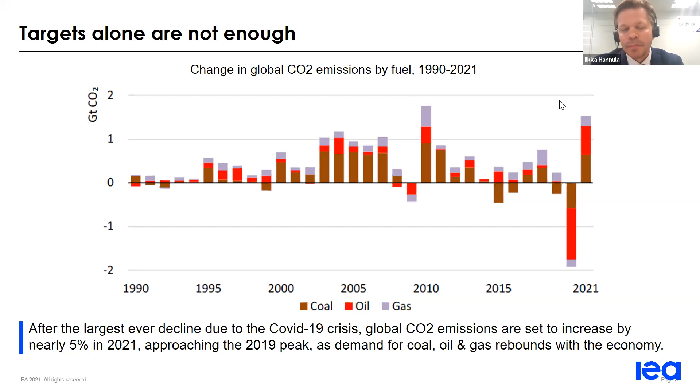Now, pledges are there, but targets alone are not enough, of course. Despite many meetings, we still have not witnessed a sustained decline in emissions. Indeed, the IEA now predicts that global CO2 emissions are set to increase by 5% this year as demand for coal, oil, and gas rebounds with the economy. So clearly now it's time to start implementing those ambitious pledges.

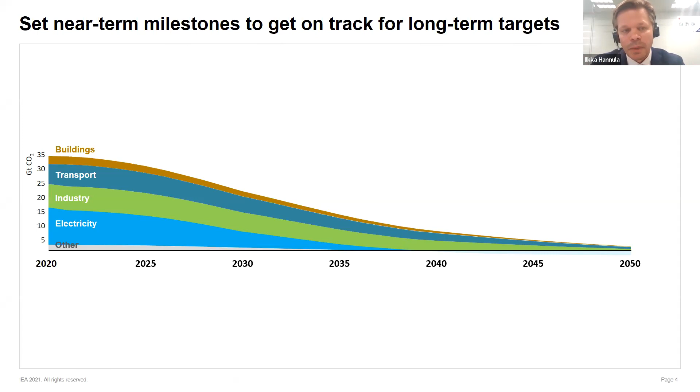And as a part of that, the IEA published this May its net zero emissions 2050 roadmap, with the specific aim that, because the long-term targets are important, but it's very difficult to say what we should do today or tomorrow in terms of policy so that we would know that we are on track with our ambitious long-term goals. So this roadmap, the first global net zero emissions roadmap, has taken this long-term view and broken it down into near-term measurable milestones that can be considered by policymakers, so that if you implement these, then you know that you are on track with your long-term goals.

The roadmap includes over 400 milestones. Here, some of the most important ones are written out. I want to highlight some things that I think are especially interesting and important from a bioenergy perspective, like having half of aviation fuels sustainable by 2040, having a net zero electricity sector globally by 2040, and capturing 4 gigatons of CO2 already in 2035. Each of these is a big feat on its own; taken together, a complete transformation of the energy sector.

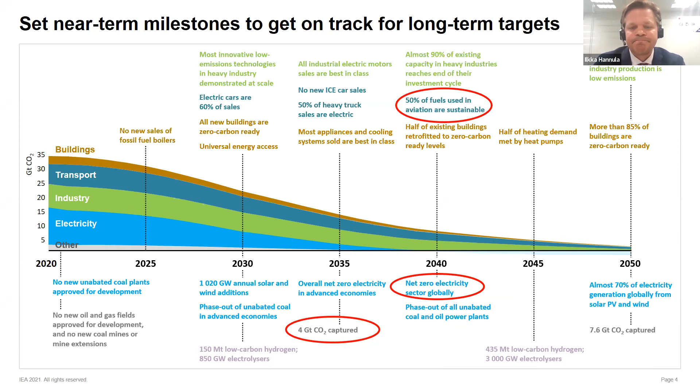So looking more closely at the contribution of bioenergy in the roadmap, we see a number of things in this figure. One of them is that bioenergy contributes to all relevant energy sectors: electricity, industry, heat, and transport. The total use of modern bioenergy increases fourfold, from about 25 exajoules today to about 100 exajoules in 2050.

Fourfold increase, while at the same time, the traditional use of biomass, which is significant today, mostly meaning collection of fuel wood for cooking purposes in developing countries, which is unsustainable and polluting, is phased out completely during this decade in the roadmap. So the unsustainable part is phased out, and the modern sustainable part quadruples in the next 3 decades. So in 2050, bioenergy meets almost 20% of total energy needs and becomes the second largest source of energy supply, second only to solar. So obviously, bioenergy plays a crucial role in the net zero emissions roadmap.

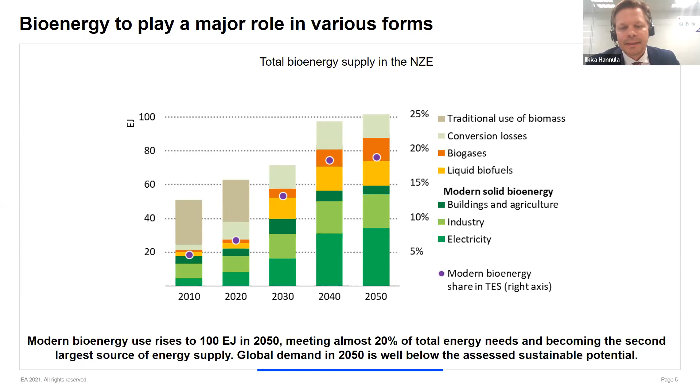Looking more closely to fuels, we see significant expansion both on gaseous and liquid. So on the gaseous side, biogas expands, but especially in upgraded form, as biomethane, it witnesses a significant expansion. In liquid biofuels

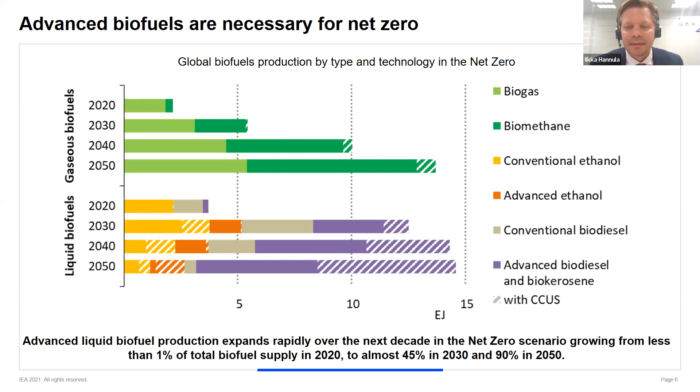side, advanced fuels grow and expand rapidly over the next decade, so that they go from less than 1% of total biofuel supply in 2020 to almost 45% in 2030, and then eventually 90% in mid-century. And increasingly they are going to be produced in connection with CCUS. So you see the shaded part of the bars here, they illustrate the share of production that is connected with CCUS.

Also on electricity, bioenergy increases. Here you can see that it happens both in terms of absolute generation, but also as share of electricity generation, which is significant because electricity production expands significantly in the roadmap, but still bioenergy grows more than the total supply, becoming about 5% of electricity generation by 2050.

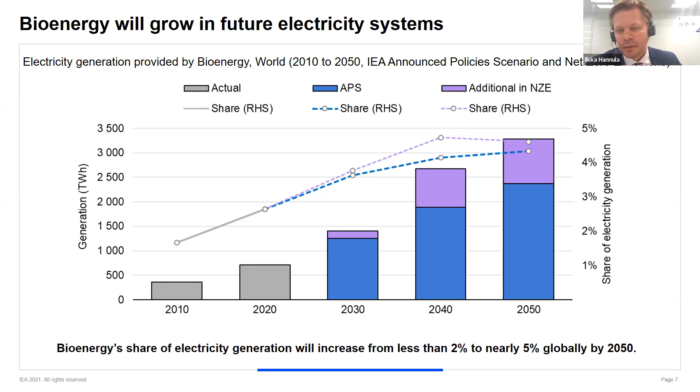But bioenergy in the electricity system does not contribute only through low carbon electricity, but it also provides other services. So as you can see here, a case study for China on the right-hand side, the 2060 situation. Bioenergy not only provides energy, but it provides stability, it provides flexibility and capacity adequacy.

So it is this unique feature of bioenergy that it can address all the services needed in the power system, whereas some other, although critical, technologies are more limited to some services than bioenergy. So a very important part of the story here.

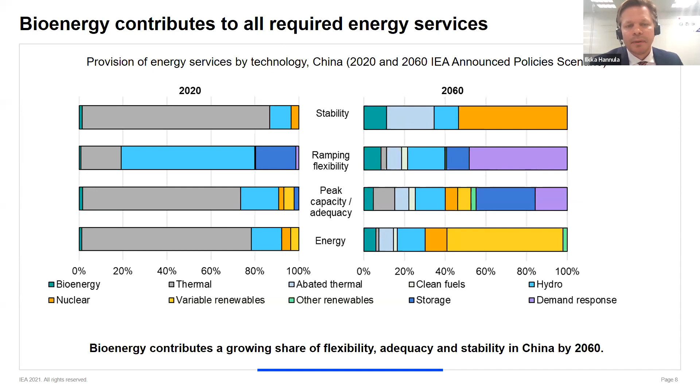And then I want to finish off by focusing on this capture part. So bioenergy with carbon capture, utilization, and storage. By 2050, the roadmap sees almost 8 gigatons of carbon dioxide captured per year. That comes from a diverse range of sources, mostly from industrial emissions and from fossil fuels, but about 1/3 of the CO2 is biogenic and atmospheric in nature. And of that, about 80% is stored, and the rest, about 20%, is utilized for products.

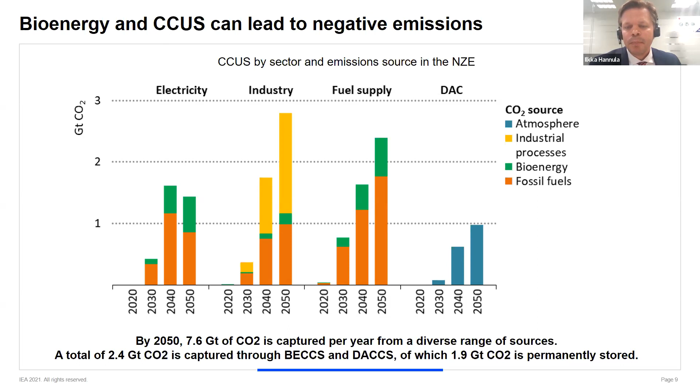So I think a really interesting part, again, coming to the front as a byproduct of net zero emissions pledges, is that you cannot achieve it without negative emissions, and bioenergy will play an important role in that respect as well. All right, so I want to give some concluding remarks here.

So as shown in the roadmap figure, I think it tells quite convincingly that to reach net zero globally by 2050 is nothing short of a revolution, an unprecedented transformation in the way we produce, transport, and use energy globally. On the low carbon fuel side, liquid biofuels, biomethane, and also hydrogen-derived fuels in the roadmap help to decarbonize sectors where direct electrification is challenging and costly.

And when we have an energy mix that is dominated more and more by wind and solar, sustainable bioenergy plays a major role in flexible energy generation, in industry, in transport, and is increasingly used in connection with CCUS. We just published a few weeks ago our latest edition of the Tracking Clean Energy Progress. And from there, when you contrast the current development with the net zero demand, bioenergy is not on track. There are many technologies that are not on track with net zero emissions, and bioenergy is one of them. So a strong boost for bioenergy is needed to be on track.

We need to both deploy everything we have commercially available today at an increasing rate, but importantly, also for bioenergy, we need to develop new technologies during this decade so that they will be available commercially in the 30s and the 40s, to shoulder the responsibility of further carbon emission reductions when we are chasing that net zero. Thank you very much.

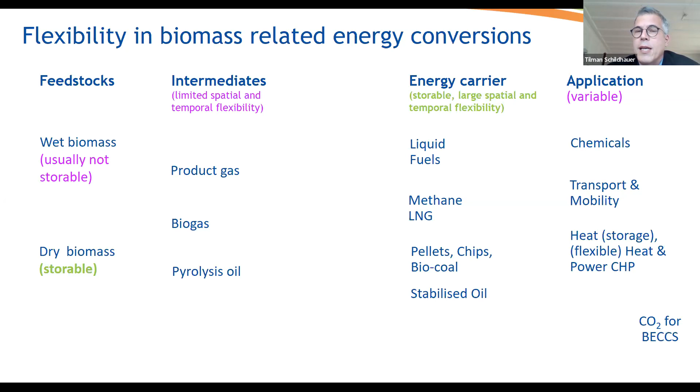Now, this flexibility of bioenergy has two dimensions. One is the short-term flexibility, and this connects immediately to electricity production by renewables, especially wind power or photovoltaics. If supply and demand do not match, biomass could help two ways: producing electricity when it's needed and not enough is supplied, or taking up electricity which cannot be used where and when it's produced. That is what we call short-term flexibility, positive or negative.

The other one is long-term flexibility, and that means we convert energy into a form where we can transport it or store it. So we get a larger spatial or temporal availability of this energy.

What we recognize is there are existing technologies used today, and in the next slides you will see them indicated as green arrows. There are emergent technologies, which have been demonstrated successfully on the technical level, so they work, but at the moment they are not so much applied because we are lacking business cases. And with the red arrows, you will see the ones which are still under development, below pilot scale.

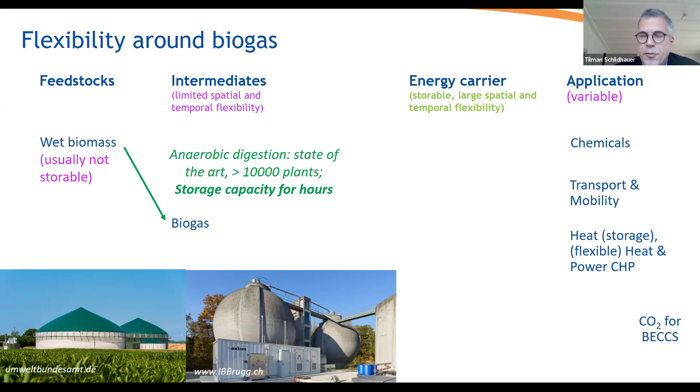There are two ways to use that. One is using the long-term flexibility, so producing an energy carrier for which we have a storage and transport infrastructure, that would be methane, or if you liquefy it, LNG. That is by separating the CO2 from the biogas. This is also a very well-known, well-accepted and very often used technology, also very flexible with time. You can start and stop these plants relatively fast.

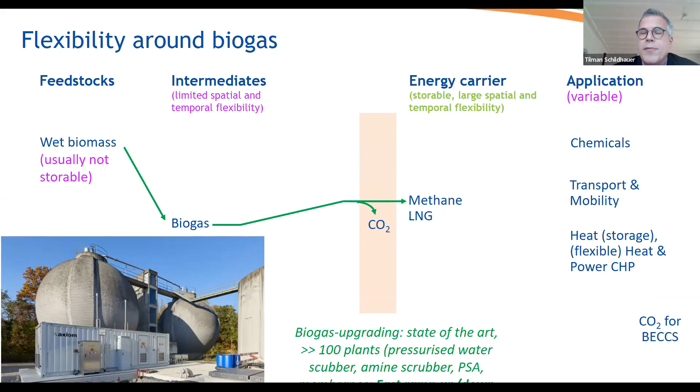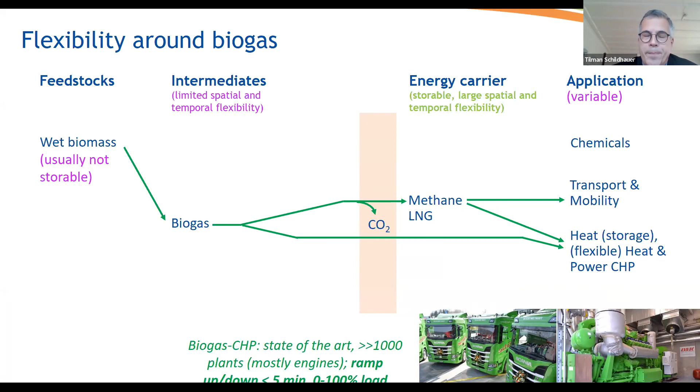So these are technologies that are well known. What is a little bit developing is using biogas for power to gas. So we actually use the CO2 part of the biogas to store hydrogen in form of methane. So we convert hydrogen, which is produced from renewable electricity, which cannot be used otherwise. We store it by converting it to methane, and then we use the methane infrastructure.

And this technology technically has been shown in several plants. So we know there are plants which work in megawatt scale. So we are here at TRL 7, 8. And this is a technology which is on the onset of being used also commercially, but at the moment there are very few plants.

What you usually have is when the plant is warm, then you can start up within 20 minutes. Most of them actually are able to inject the methane into the grid within 10 minutes or sometimes even 5. So they're really nice, and depending on the technology, also here have a very strong load range. Some of them can work with very little hydrogen, others start at 20%, but generally a very flexible technology to take up electricity, so to offer negative ancillary services on the one side, and converting biogas, which cannot be stored, into an energy carrier which can be stored and transported.

And the last thing which actually comes out, both from the upgrading of the biogas, but also in the use in the CHP: in principle, there is biogenic CO2, which you could capture and use for negative emissions. This is actually not so much done so far and more under development, but clearly an option to reach net zero emissions. And in future, it will most probably be a kind of a balance where we use the biogas for negative ancillary service of power to gas in summer, but in winter, when no hydrogen is available, we might go and then separate the CO2 for negative emissions.

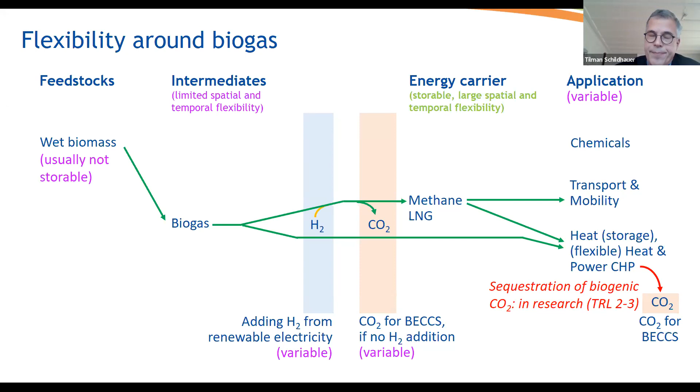Let's have a look on the wood side. There, the first thing we can do is actually forming chips or pellets and using it, again, in combined heat and power plants, or to make a little deviation by producing product gas by gasification. Again, many plants in small scale. If you have a combustion or a gasification, then the startup time is not that fast. It's between 1 hour and 1 day, depending on the size.

Load range is moderate. But again, like in the biogas plants, the engine or the organic Rankine cycle, which actually uses the heat or the chemical energy input, can change the load very fast, and again can jump in for flexible peak generation, or turn down electricity production into part load if too much electricity is in the grid. So again, this is a very well-known and well-accepted technology which could be used for short-term flexibility.

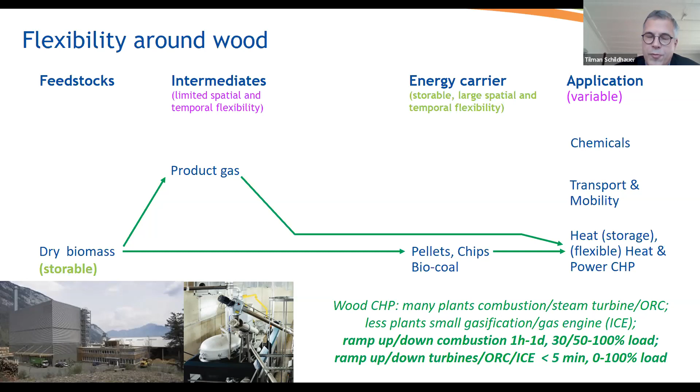Generally, this way over gasification is also possible in a large scale. So we know a couple of these plants; here again, because of the size, gasification most probably takes nearly a day, but the gas engine itself is very flexible.

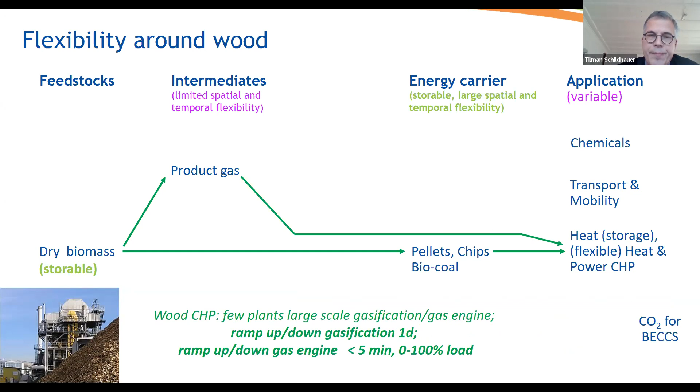Something which emerges now lately is actually pyrolysis of wood and similar feedstock, where the pyrolysis as such is more or less commercial. So there we see the first plants being built at several places. As I said before, the pyrolysis oil itself should be used relatively fast because it has this tendency to change chemically. But in principle, it could be stabilized with hydrogen. This is something which has been shown in many experiments, and the technology is very close to what we know from refineries. So I think once the business case is there, that will be applied in many places, because it's another way to get decentral biomass into an energy carrier which can be easily transported.

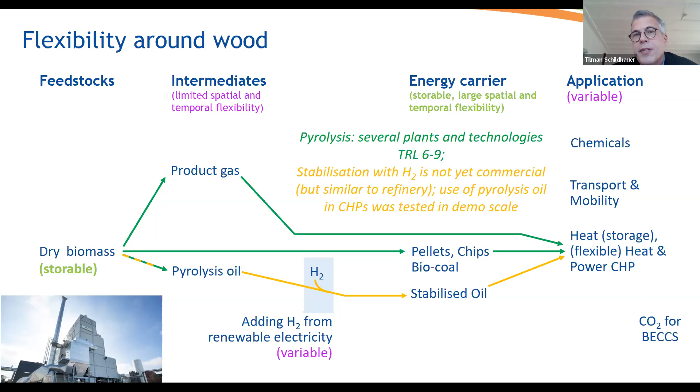And principally, like in the biogas case, there would be an option to add hydrogen to the system or take out CO2 for negative emissions. So use it flexibly, and even maybe change that behavior depending on the electricity supply or the electricity price. So when electricity is cheap, you add hydrogen, you produce more of the fuels and get all the carbon into your product. And if there's no cheap electricity, you maybe do not add hydrogen, and then you have to separate CO2 because it's a coupled product of all these fuels.

And then you could actually capture the CO2 and use it for negative emissions. And again, like in the biogas case, this negative emission pathway is not yet developed so far, because so far the incentives were not there.

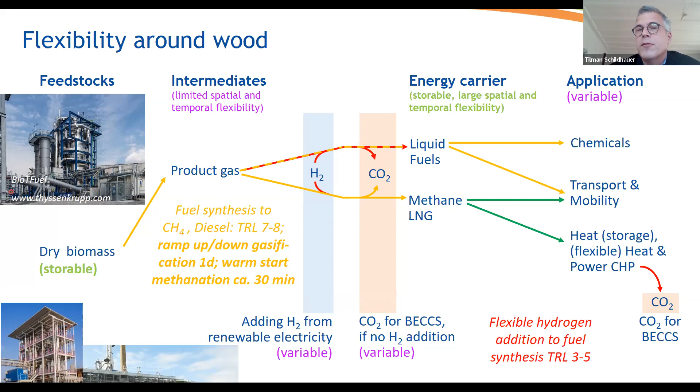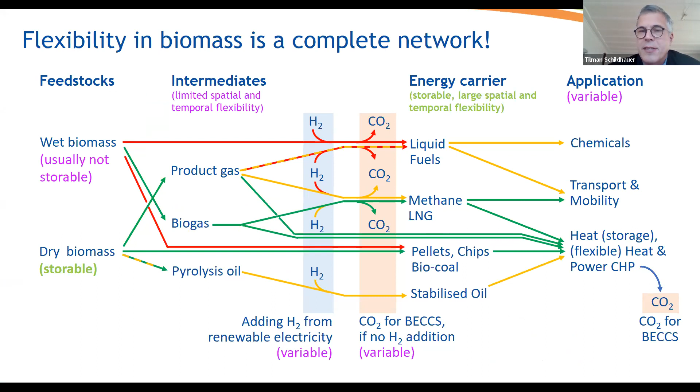So if you put all that on top of each other, we see actually there's an enormous network of flexibility options for bioenergy. And I think the future energy system can use all of them. But as I said before, some of them are more applied than others, and now we distribute them into this matrix, and we see biogas upgrading is the only technology which offers long-term flexibility and which is done in large scale.

While this peak generation we see at many places is based on biogas and also on dry biomass, and we see many technologies which are coming up only slowly, which have been demonstrated but which are not so used so far. Many of them based on wood gasification. The pyrolysis oil is there. That is something which can come up.

And we see a couple of technologies which I didn't show in the previous slides, hydrothermal processes which are actually able to get even wet biomass on the same process routes like dry biomass, chemicals from biomass. So these are things which come up. Maybe also using SOFCs as combined heat and power plants.

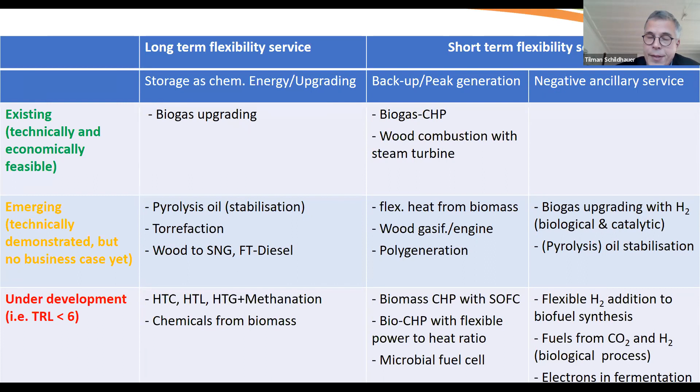Coming to my last slide, so what we have seen is there are many technologies. They have been demonstrated successfully, so they work. What we see is business cases which work, beside the combustion of wood, which always worked since ever. The business cases which work are the ones which start from waste streams, and this is usually biogas. And then all the technologies which can offer peak electricity production, because already in many countries there is some support scheme or some incentives to do so.

For wood, it's a little bit difficult to go to these more advanced technologies, because the combustion of wood is always a potential alternative, which at many places also makes sense if you anyway need heat in the first place. So you have to really look carefully where you use the wood.

Flexible hydrogen addition is something which will be more of interest in future. And this is in balance with the use of the CO2 for the negative emissions which you might need in future, and where bioenergy is one of the most important sources. And what we have seen is you have all these technology options. They have many advantages, but at the moment, most of them are not valued in a way that you have incentives to really do so.

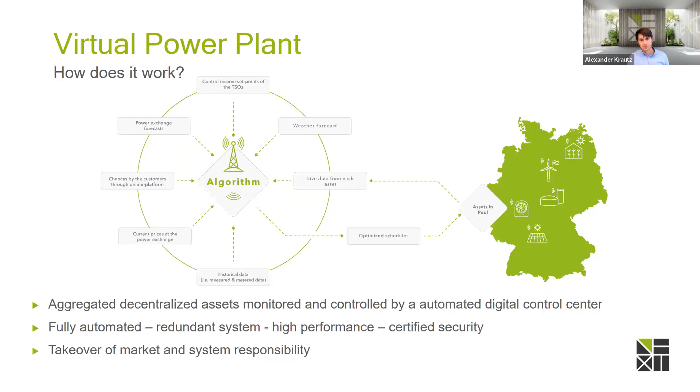Some short words on the wholesale market. That is where the electricity is traded. But it is not one market. A lot of people say the electricity market, but we have the long-term market, the day-ahead market, the intraday market. There are a lot of markets where you can trade your electricity.

At this market, each participant has a balancing group and is responsible to balance the balancing group. If you have a wrong forecast, or there are bigger maintenance works or something like that, then you have to secure that your balancing group is balanced. So you have to make a trade, or balance it out with flexible assets. There are different possibilities. On the other hand, we have the ancillary services like control reserve, which are provided to the grid operator to stabilize the grid frequency. So we have here two different markets, more or less.

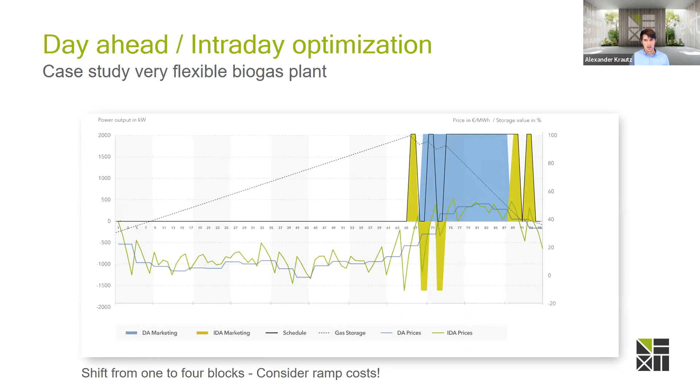Compared to this, if we talk about ancillary services, then we talk about a pool concept. To provide ancillary services to the grid operator, we have a tender. Such a pool concept is not easy to manage, but a VPP gives you the possibility. We have a daily tender, and we have to guarantee availability of 100% to the grid operators. So we need some assets in the back, and such a pool concept can only be provided with a VPP, because you need a fully automated system, and you provide a capacity, but also the possibility for the activation.

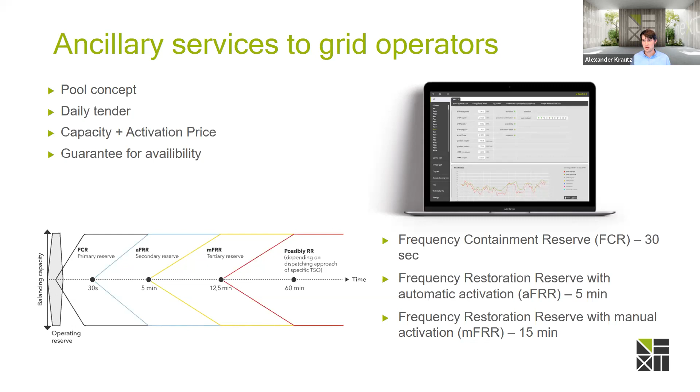Here below you can see how the FCR, aFRR, and mFRR market is structured in Germany and in most of Europe. In other countries there are similar products, but with slightly different restrictions. This slide shall give you an image of how the activation of an aFRR call works. After the call of the TSO, the system selects the best assets and activates them. If one asset is not available, the system activates the next one.

The TSOs gave us the feedback that the performance of our pool is better than the performance of a conventional power plant. You can see it here. At the top, we have activated 376 assets all over Germany, fully automated. And after the call ends, the system has to bring all assets back to the baseline. And here, a good performance is required.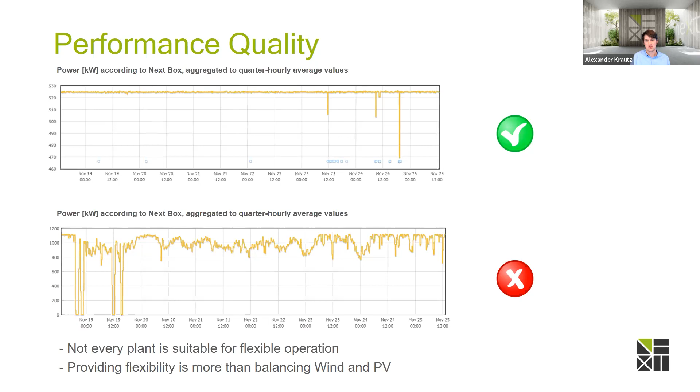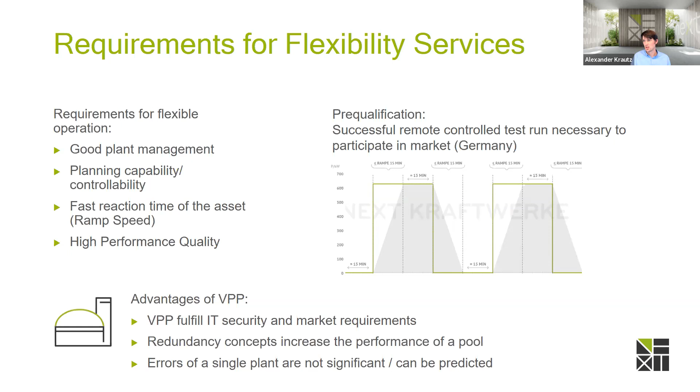So what is important for providing flexibility? Important is good plant management, and that you have a planning capability and that you can control it. If we look at older assets, it's sometimes hard to control or plan them. And as I said, also important is a fast reaction time, good ramp speed, and high performance quality. And what we also need to provide flexibility with a pool of assets or with a VPP is a fully automated system.

Because of that, we also have a fully automated customer portal. We have a web solution and an app solution, so the customer can get push messages and has the possibility to manage and remotely monitor the assets fully digitally. Your colleague can sit behind you and see how his asset somewhere in the world works. This brings us to a new situation, and this is very important for some of our customers, because not every customer is at the asset 24/7.

So my conclusion: if we look to the next decade, the demand for flexibility at the wholesale market and the ancillary service markets will increase. To participate in the market, market opening and development of wholesale markets and ancillary service markets are required. In a lot of countries, there is not the possibility to provide flexibility with bioenergy assets. In some countries, there is no real wholesale market, and in other countries, it is not allowed to pool assets to provide ancillary services.

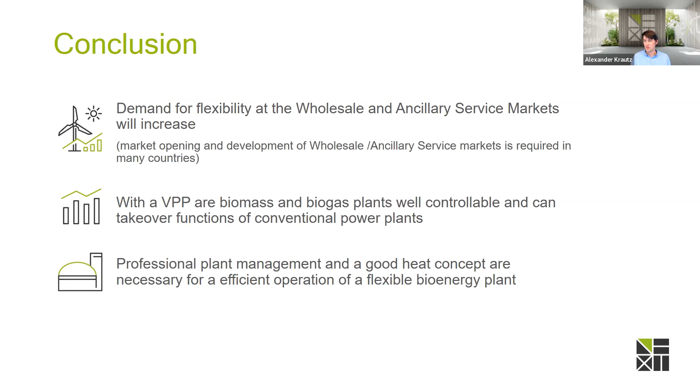The VPP gives bioenergy plants the possibility to participate in such markets, and with a VPP, you can control these assets very well, and you can take over functions of the conventional power plants. But professional plant management and good heat concepts are necessary for efficient operation of flexible bioenergy plants.

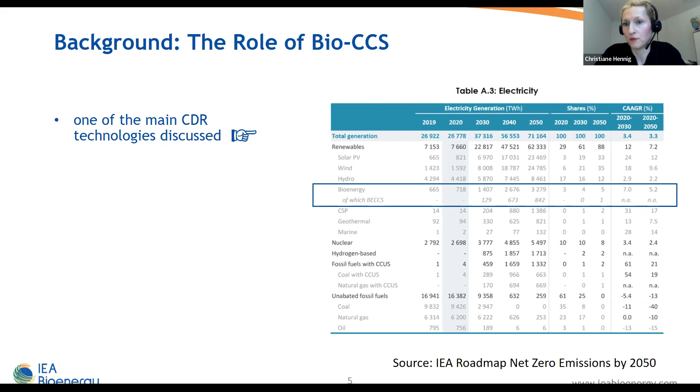So here I used one of the tables that is included in the IEA roadmap Net Zero Emissions by 2050. So you can see here that bio-CCS has a dedicated share in here. So it's going to a main part to contribute on this pathway and to provide negative emissions. So this is only one example of many where this appears in this manner.

What is interesting to know on bio-CCS, it can actually be implemented anywhere where there is biogenic CO2 emissions. So this is really something that is good to know. Of course, what would be important is that the source is rich in these CO2 emissions, so we can achieve a high capture rate. What else is important is a broad range of sectors can be used for this. So it's not only when you think of electricity, but of course it could be also in other industrial facilities or heat and power or in pulp and paper mills. So it's much broader where CCS could come in.

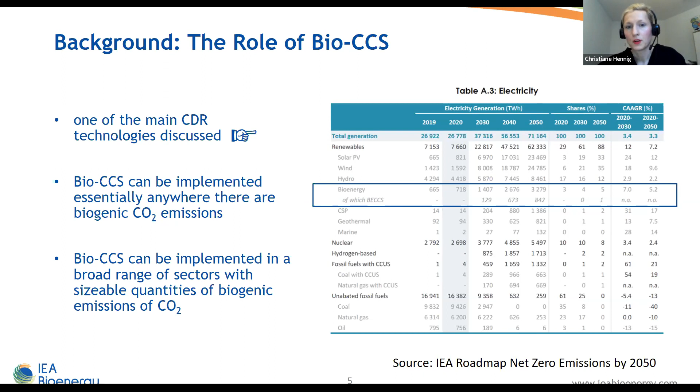Now having a look independently at flexible bioenergy. So at the beginning and in some literature, flexible bioenergy is mainly related to the electricity system to provide grid stability there and to integrate wind and solar power. So this is the main understanding or what we see that it is often related to. However, if we go into this transformation of the energy system, more sectors would be needed where we can use flexible bioenergy. And it's possible to also use flexible bioenergy much broader.

This you could see very nicely in the presentation before, where you could see that there are different outputs, different inputs that are available. So it's much broader than this. And if you see this, then we can think of flexibility in terms of inputs. So as presented, it could be wet or dry inputs, but also in outputs. So seeing different energy carriers, also usage in different systems, for example, also for transportation. So it's not purely electricity.

And it is something that was taken on within the work of Bioenergy Task 44, that here the definition got broadened. And I think this is very important also for the further understanding of our research, that here we see a definition where it's related to a bioenergy system that can provide multiple services and benefits to the energy system. So it's much broader, it's the energy system. And we have multiple options to provide flexibility there.

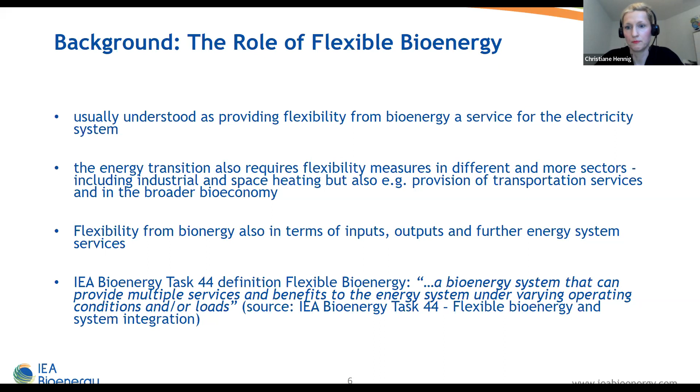So after having these independent looks at bio-CCS and flexibility, we want to come now to have a first look when combining them. So what do we see when we have bio-CCS and flexible bioenergy? What first came to our mind, or what we figured out, was that they're implemented at a different speed.

At different speed, we're relating to that we can see in some countries that flexible bioenergy is already in place. And as you could hear from this presentation from Alexander, there are already really strong players who can provide these flexible bioenergy services in relation to grid stability and integrating solar and wind power. On the other hand, within the bio-CCS arena, we could see that all these serious considerations happened in the last 5 years, how to actually implement this.

So we're talking about implementing. It is not that real life testing already has taken place on a large scale. So this brings us to the second point and main challenge, that we are still with bio-CCS at more pilot, and we have to bring it to full scale. And when doing so, we really have to see what happens when we add CCS to existing bio-based chains that have already a certain output, have already a certain modus operandi, and maybe are running already flexible.

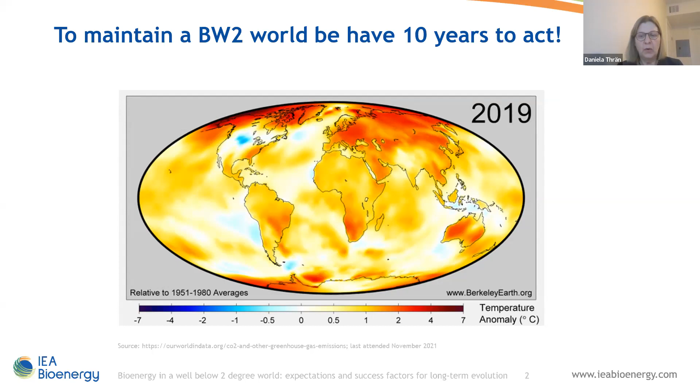And we heard a lot from Ilka already about the global perspective here. How can those synergies look like in the shorter term and also down to earth? First of all, we need sustainable feedstock as a starting point, and of course also modern bioenergy. Ilka talked already about it. Sustainable resource means much more residues and waste from cascading uses, and this means also to be flexible for different feedstocks.

Second, we also heard a lot about this. We need variable renewables, which come into the system, to have a flexible counterpart. And this is the operation flexibility, which has been given as an example from Alexander. Operation flexibility is mainly around the electricity system. And it is important to point out here, to unlock those synergies, it's not only about energy provision technologies, but also about networked information exchange and smart control systems.

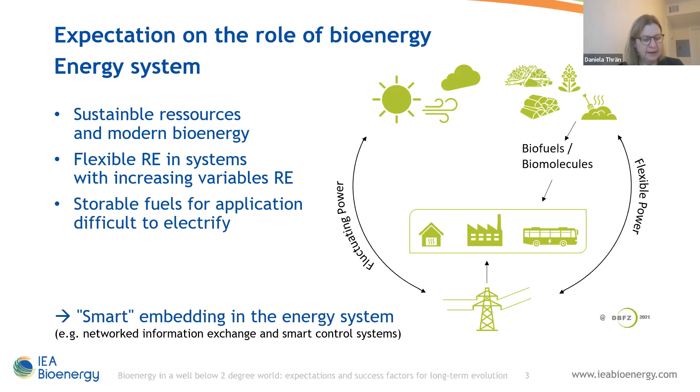Third, it is important to have storable fuels for applications difficult to electrify. For example, we heard from Ilka the aviation field, but there's also the marine sector and some other sectors. And here we talk about product flexibility to produce different biofuels, but maybe also biochemicals.

Last but not least, in the last months and years, also hydrogen came into the system, and hydrogen is another storable fuel. And if we consider green hydrogen, renewable green hydrogen, then the question arises how hydrogen and bioenergy interact in the best way. Hydrogen can be made from biomass, but this is more a niche application. When hydrogen is used in biomass processes, and Tilman showed this nicely, then we can increase yields and have additional options. So this might be the more interesting factor.

And our work in Task 44, flexible bioenergy, also showed it is not only that we have a wide range of technical options, it is also about very different countries' expectations and prioritization, which is also clear because we have a different starting point, different energy systems, different biomass availability, also different climate strategies. So there's a wide range of priorities also here, and we have summarized this in a country's expectation report, which you can find on the website.

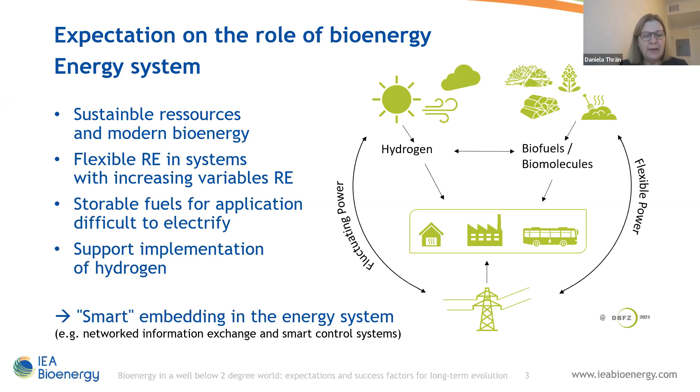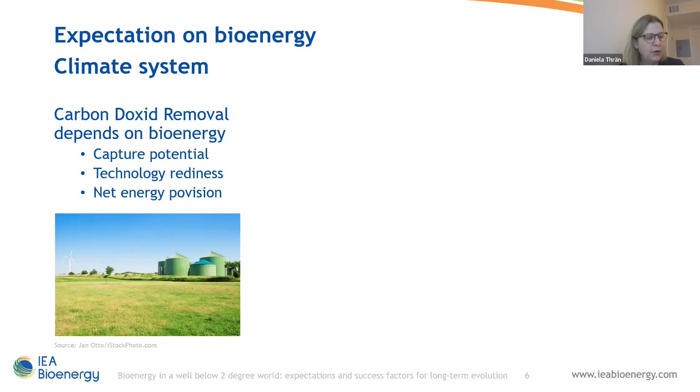And of course, we heard from Ilka, it is necessary to consider different options for negative emissions, nature-based solutions, direct air capture, and bioenergy carbon capture and storage. But when comparing those different options under specific conditions, I'm sorry, here again, this is an example for Germany, we see 2 things. One, we do not have a silver bullet to bring reasonable contributions together. It's only possible if we combine the different solutions.

However, when it comes to the implementation readiness, so the technical readiness level, which is given here on this example on the right-hand side in black dots, then it's easy to see that only certain options are available already fully market commercial today. And of course, BECCS is among those options.

And if we also look at the net energy provision, which is given here in green circles, and which is very important, especially for the next decade, because green energy, green electricity is still a bottleneck for the energy transition, then you again see that BECCS is a promising option, especially in the near term.

So on the one hand it is important to start implementation of BECCS options, but it is also to be expected that they will be the first ones which really have a chance to contribute to the market.

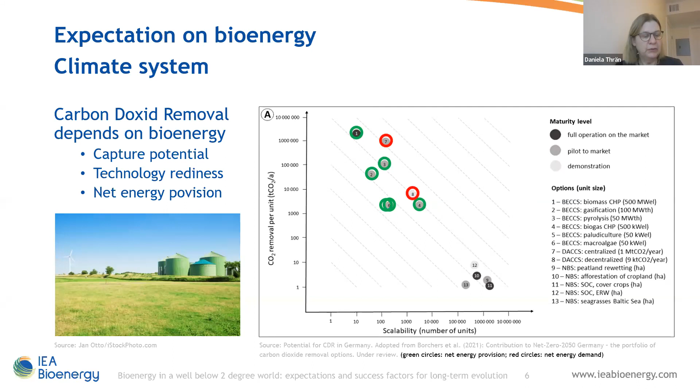What is the conclusion? The success factors of bioenergy in a well below 2 degrees world are its integration and flexible bioenergy as an accelerator for energy system decarbonization, but we also see 2 more aspects. One is synergies of green hydrogen and bioenergy deployment, which is important but not very well developed yet. And second, we see the deployment of BECCS and BECCS value chains.

Christiana has given some flavors of the ongoing work of IEA Bioenergy here. And the question is, how can this whole package serve the climate system in the best way? This is exactly the aim of our further work in Task 44 Bioenergy. It is about, on the one hand, global approaches and system benefits in general, we heard about this, but down to earth to the best cases, examples, and the necessary market conditions.

How to bring those different systems together and how to serve both the global perspective and the down to earth examples for fast implementation of flexible bioenergy and the appropriate consideration in the long term. Thank you very much.